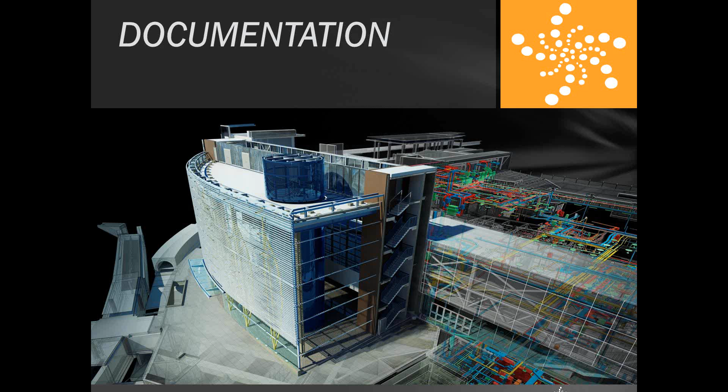So to start with, I'm going to look at some of the new documentation tools. First thing is searching. This is something that happens on just about every project. When you first start to use Revit, we're going to make new views, because every view of the model is a different kind of view.

I want to look at the first floor plan with color. I want to look at the first floor plan for code, for egress, for furniture. By the end of the day, you have one floor plan, and you might have 10 different views. Small building, not a big deal, but as your projects get bigger, you're going to have a lot of different views.

And for something so simple, it's finally in there: the ability to search your project browser. So if you need a specific view, you're not having 20 different employees spending 20 minutes a day trying to find it. It might seem simple, but that time adds up. This makes your workforce much more efficient in getting to where they need to do their work.

From that, we have better visibility and display controls. It might not seem like a big deal, but look at it from the AutoCAD days—one of the biggest issues was layer management and control of your views. Now that we're no longer in CAD, we're in BIM, the main emphasis is on information, but we still have to make sure things show up correctly when we print out our documents, since that's still the deliverable.

One of the things this really benefits is the ability to control and track all of my views, to make sure they're matched the way they should be. So if I've got a drawing standard, things that should be applied, I now have more things I can put into that template, and I can track that template's usage a little bit better.

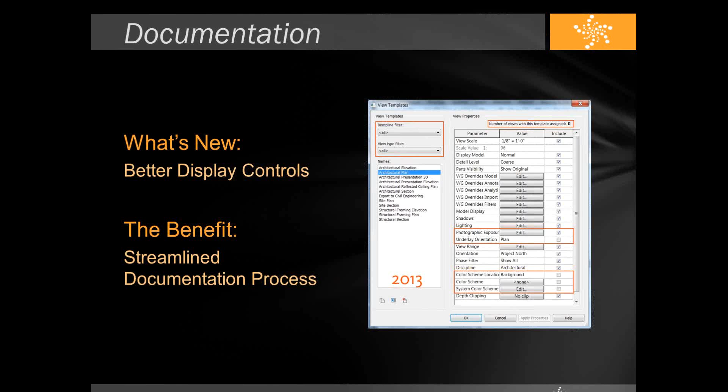So moving into the content generation portion of this: stairs. This has been a big one. I've been using Revit since version 6, and since then there have not been any updates to the stairs. So that slide Mike showed you with the old car and the new car—that's pretty much the jump this is starting to take.

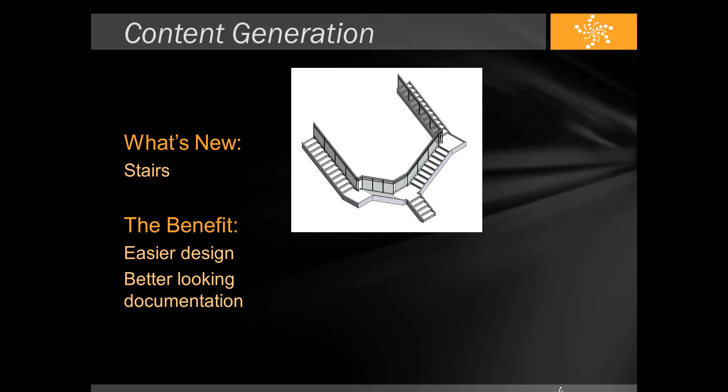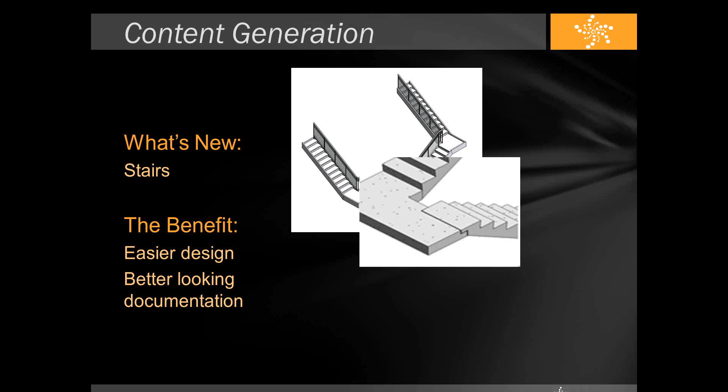What this is actually doing is giving us the benefit of doing stairs like that, where you see it's more of a Y shape. Setting up something like this, where if you have precast construction, you can actually model it—so you don't even have to detail it, you can model the connection between these very quickly.

A big gripe that a lot of people have had over the years with the stairs is that it doesn't look the way that they want, or it doesn't display the way that they want for the documentation sets. So it's giving us a lot more control of both the modeling aspect, the design aspect, and the documentation aspect. This is definitely a good step in the right direction, giving us the freedom we need to design the way that we want without having to resort to workarounds or very complex ideas.

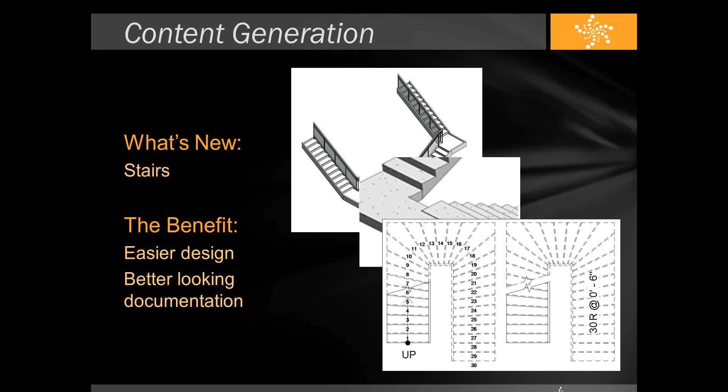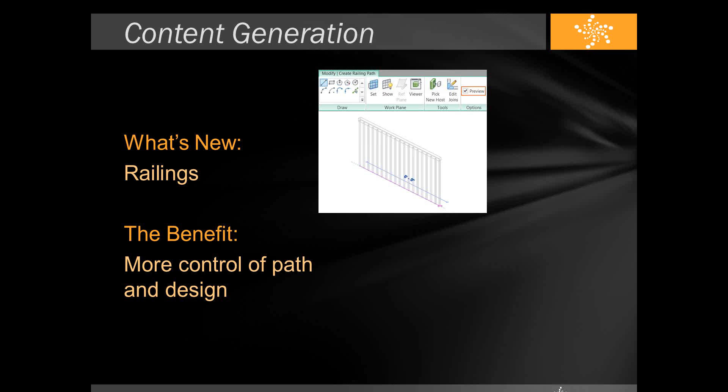Now, sort of in conjunction with the stairs are my railings. Probably one of the main things with the railing is that you can actually preview what you're working on. So rather than just drawing a purple line and finishing it, then realizing that's not what I want and having to go back in and edit again, I can actually preview the railing as I'm building it. So I can confirm that's actually my design intent prior to leaving my sketch mode, which speeds up and makes my design process a little bit more efficient.

In addition to that, I have more control over my parts. I can get very detailed very quickly and easily, and I have a lot more control over the path. Now, that image on the bottom right-hand side, for most users of Revit, that railing probably looks like a post, something you add to the end that just finishes or terminates. The thing is, a post is typically custom content - it takes time and ability to create. But that right there is not a post. It's a user just going and sketching what he intends that railing to actually do, without having to create custom content, and without needing every single user on the project team working on stairs to have an advanced level of family knowledge. It's just picking it, drawing the path, and then finishing what you want. So it speeds up the actual design and documentation process and makes this much more fluid and much easier.

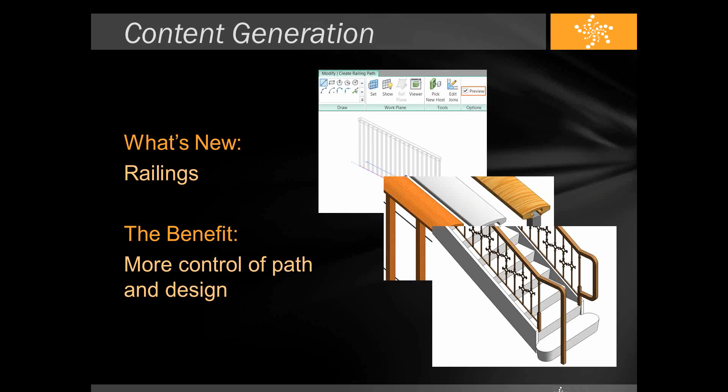Now, another one here is parts. The idea of parts is not new to Revit - this was actually added a year or two ago. What is new are the different things that you can do with the parts. I can actually merge different parts together, and this is something I'm actually going to be showing during the demo. So if what I want to do is have a corner that's essentially maybe precast, I'd have to actually draw this as 3 separate walls, because I couldn't really draw and join 2 separate parts together before, but this is something I can do now.

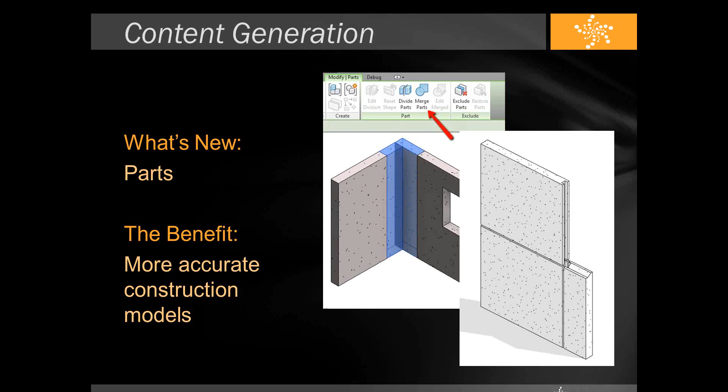Now, visualization. You've had the ability to do rendering in Revit for a while, and what they recently added was the realistic view. The nice thing about the realistic view is you can get an idea of what the view would look like when rendered without having to spend the time or energy to actually render it. Now, they've updated that so it includes RPCs, so you can actually see the rendered content. The thing is, it's still not a real rendering.

What they've added this year is an actual ray tracing view. So if you look at it this way, you've got your old school colored view, and then you would look at your realistic view - that's one step above that. Now we have the ray tracing view, so you'll have better images, both day and night, so you can really see what's going to happen. What happens when you have lights in the room during day, during the evening? What happens if you have a decal, which is essentially an image in the view - how will that actually look when I render this? So if I want to do a rendering and get a quick preview at a good level of quality, this allows me to do that.

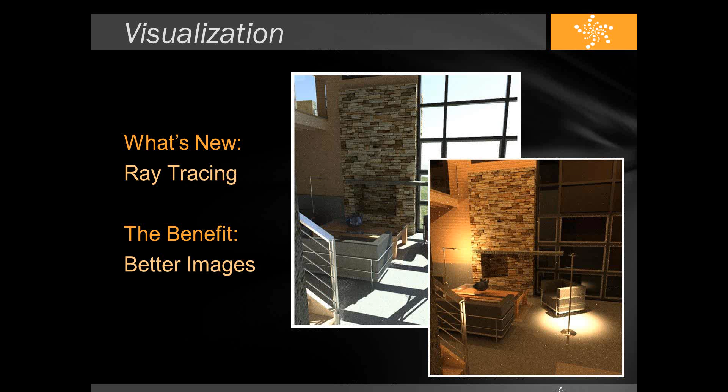Let's say my computer is barely running Revit as it is, or I have a lot of renderings to do and I need to keep working. I can't stop and let my computer sit here and render, otherwise I'm going to lose all my time for documentation. What Autodesk is doing is they've taken all of the different features they've been trying to push for a while, and that were going to be online, and consolidated them under the moniker Autodesk 360. So when you hear Autodesk 360, that's essentially their cloud family of software.

Part of this is the rendering ability, and this is actually built into Revit right now. If you're on subscription, you have access to this and can take advantage of it. The real benefit is unlimited power when it comes to rendering. If you have one computer and need to render an image, that image might take 2 to 3 hours. Now let's say you have an office with 10 to 20 computers set up as a render farm - that rendering might take 15 to 20 minutes. If I send my rendering to Autodesk's cloud, that rendering might take 1 minute.

So if you've got a render farm, that's great - it enhances the power you have access to, because it's not just one computer working on it, you've got 20 or however many you have. The thing is, you likely don't have hundreds or thousands at your disposal. So this is taking advantage of Autodesk's servers in the cloud, and they're running what they need to get you back your renderings. It has a nice interface, and you can actually see the difference this would make based on the display and graphic level you're looking for. It'll show you how much time you're actually saving.

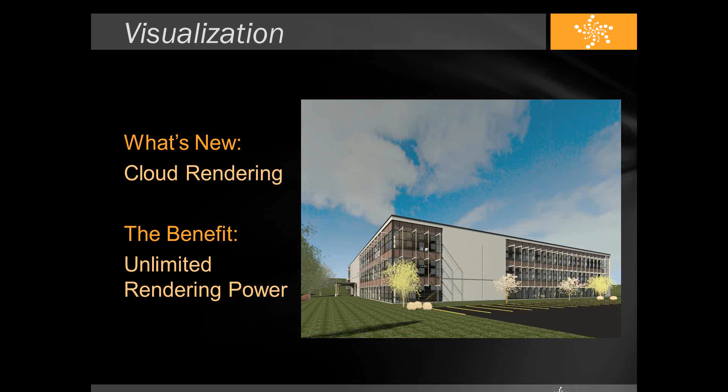So if you're using the design suite, the Building Design Suite Premium or Ultimate, what you actually have access to is Revit. You're going to have an architecture ribbon, a structure ribbon, and a systems ribbon. Now, this presentation is focused on Revit Architecture. So if you're wondering why I'm talking about Revit Structure or Systems and how that actually relates to you - you know, your business doesn't deal with that.

Well, the thing is, if you're coordinating with somebody who is using that, this actually gives you some of those features. So let's say they're still giving you AutoCAD files, but you need to coordinate with something - I now have the ability to draw in a duct, so at least I can track it, coordinate it, and make sure I'm not clashing against that.

Let's say you need to take advantage of a couple of features that for the last couple of years were only available in another program. So if I wanted to do a filter based on selection - grab 10 objects and say I always want to filter based on those 10, but I don't want to have to pick them every time - that's something that's been in Revit Structure for quite a while, but was not available in Revit Architecture. Essentially, this is taking all of those tools and features and giving them to you now.

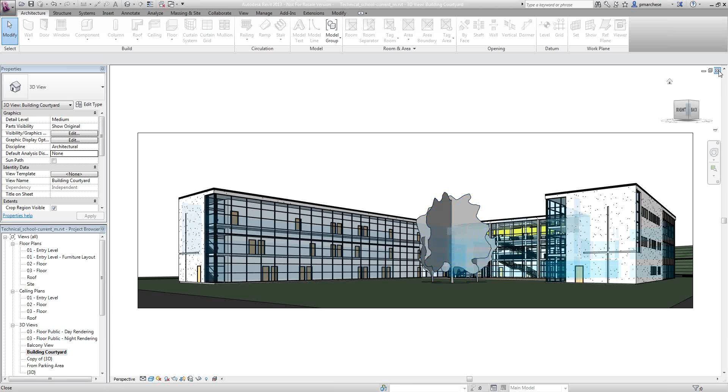All I have to do here is right-click, and the first thing there is search. When I click on search, I just tell it what I'm looking for. So they told me I'm looking for something about the courtyard, so I type in 'court.' Next, there's my building courtyard. I can say close, previous, or even force it to match the case if need be. And then I'll find my building courtyard.

So it's a very quick way for me to go into something and actually see what I'm working on. And all I'm doing is right-click, search, and then it finds my view. So nothing else besides that.

Now, another thing from this is managing my views. I mentioned before the ability to control what's happening. If I'm looking through my view here, one of the things I've always had is the ability to set my view template, but this has been enhanced. What I can see now is that this view is assigned the architectural plan view template. I can see that one view has this template assigned, and since this one is assigned it, I'm guessing that's the only one.

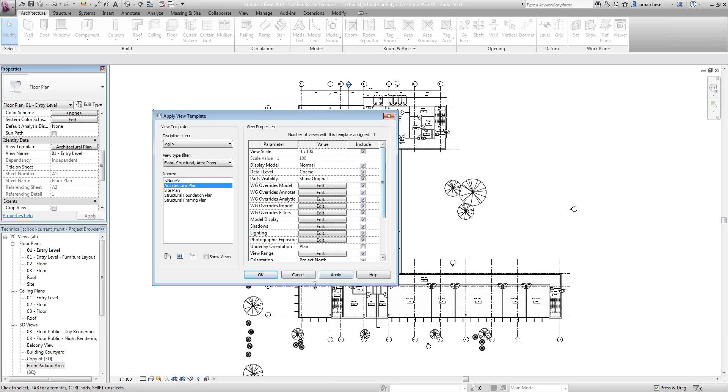Now, if you have a project and you're trying to make sure all of your views are maintaining the right look, the right line weight, the right detail level, the right things turned on and off, what I can actually do is go to my schedules, and I can track my entire project from here. I can see all the views in the project, and I can see the view template assigned to the view in my schedule now. Creating schedules and managing your views from this is nothing new, but seeing the view template in here is new. This is just a quick thing you can do to make sure that before you plot or send out your PDFs, things are according to the way they should be.

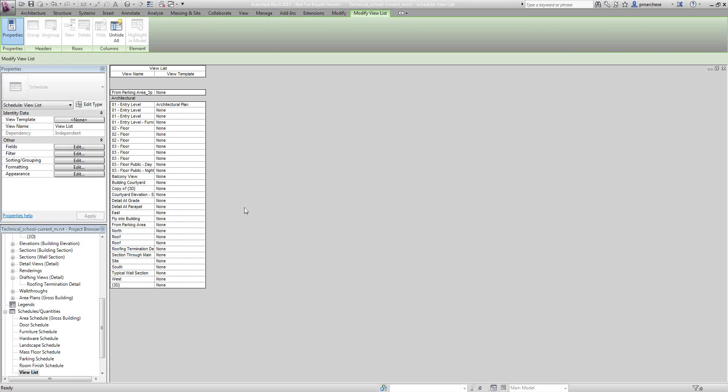So what I'm going to do is switch gears for a second and start looking at some of the modeling. Now, this is just a regular stair, nothing that different. When I select it, I can say Edit Stairs. What you're going to notice is that I'm actually in a 3D view, and I can still see my stair. I can still select it and see what's going on with this. This is not something that was there last year.

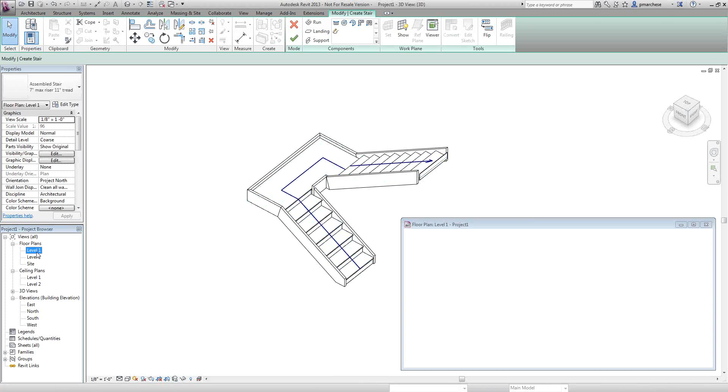When I select my stairs, I can see my counts, both at the beginning and end of each run. I can grab this and just stretch these and modify everything that's happening here. So a lot more flexibility, a lot more ease of use, and a lot more control.

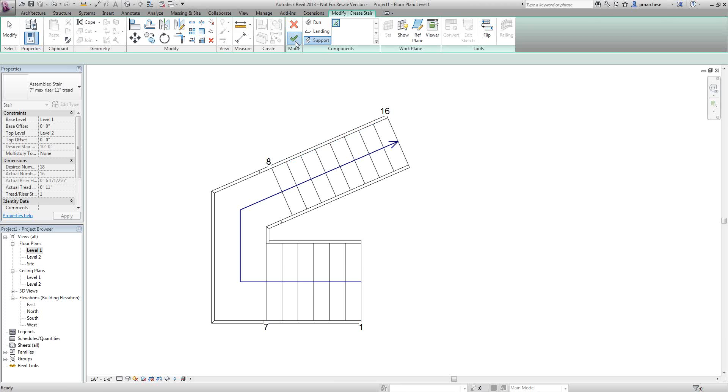And now I have the graphics here. So let's say I'm not really crazy about the way the graphics look. I can actually modify how all this looks. And if I look at the settings that I actually have, I have a lot more things that I can control. So the reason why you didn't like using stairs before was because you couldn't control their visibility or the way that they looked graphically. You actually have this control now.

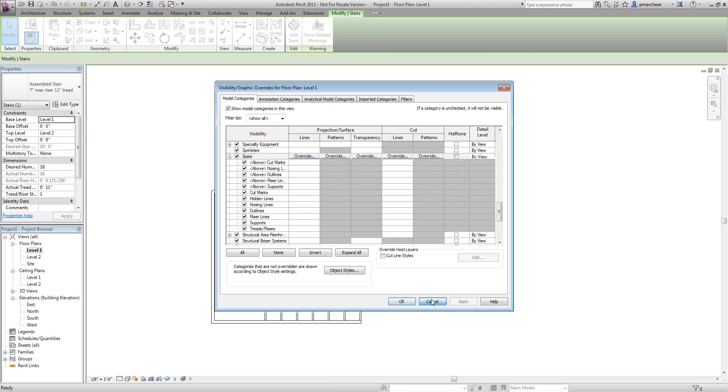I can turn off everything above. I can modify the way things look when they cut. I can actually get rid of that cut or have a double cut there with a gap in between. And probably one of the biggest things here is when I draw my stair, I can do stairs by component now. Essentially, it's me just drawing a piece of a stair, and then I can set that up to do whatever it is that I want.

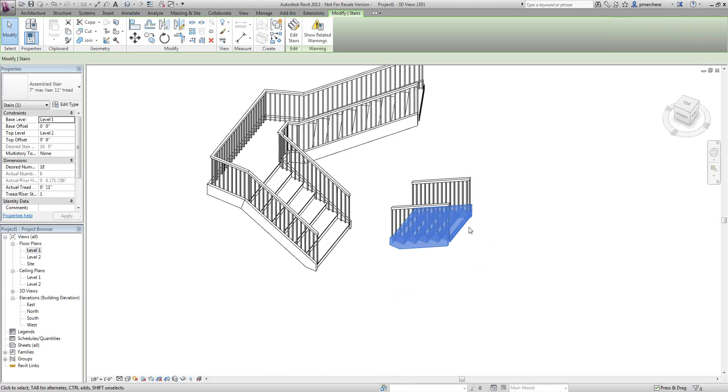So if you have a stair that has to go up and back and up again, essentially a 3-run stair, what you used to have to do was put in intermediate levels or a whole bunch of offsets. Now I can just model it.

And if I wanted this railing to keep going, I'd either have to make a new railing if I only wanted the top portion, or have to have a custom post put on the end. Now I just hover, grab that piece, and I edit this.

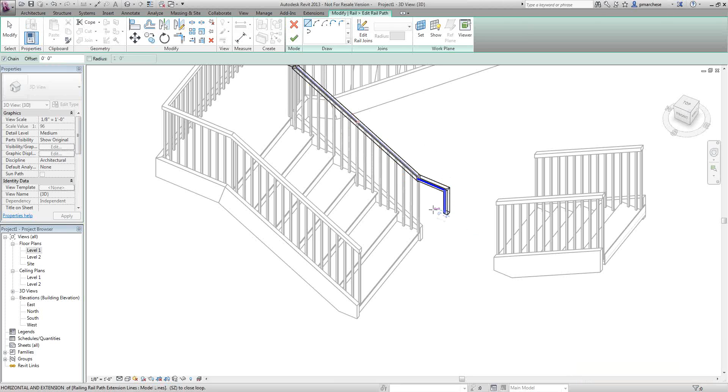So I just go in there and start drawing whatever I want this to be. Notice how I'm still in sketch mode, but I'm able to actually see what happens before I finish. I didn't have to finish my sketch and then say, oh, that's not what I was looking for. I can just keep modifying this and changing it, and it'll show me my preview so I can confirm that, yes, that is actually what I wanted this to look like.

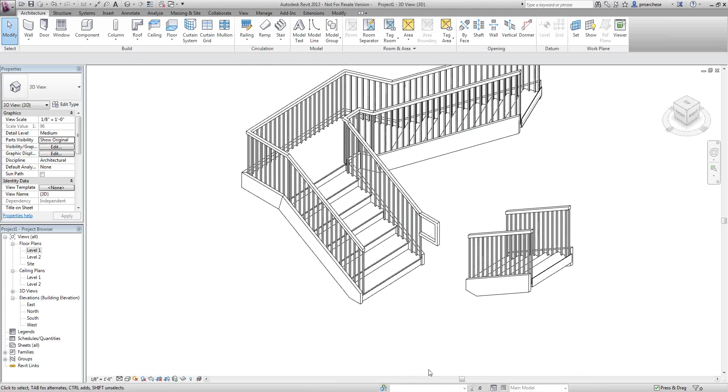Again, I'm showing the features, not my ability as an architect, but these are little things I can do. And that little nub right there, if you're familiar with the old versions of Revit, that would have been a little bit of a mess. The new version also gives you more control and more abilities to handle little issues like this, where there's a little bit of a jump.

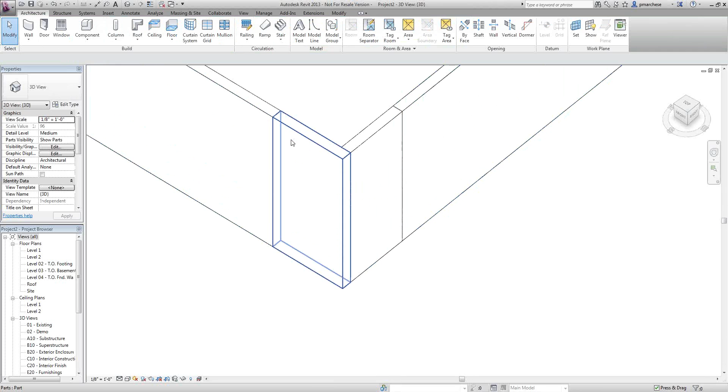So, change gears one more time, and I'm going to look at those parts. This right here are 2 parts of one wall, so that wall has been split. Same thing for here. Now, if this was going to be a precast corner, that wouldn't be 2 pieces necessarily, it might be 1. What I can do now is grab my parts and either exclude them or merge them, same as before. But now when I select these, I can tell it to merge. That's now 1 piece.

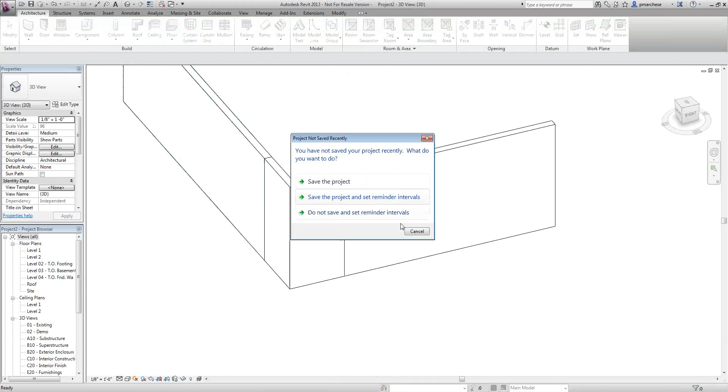So I can actually do a lot of things like that. I can even take a column, drop this in, make that a little bit taller.

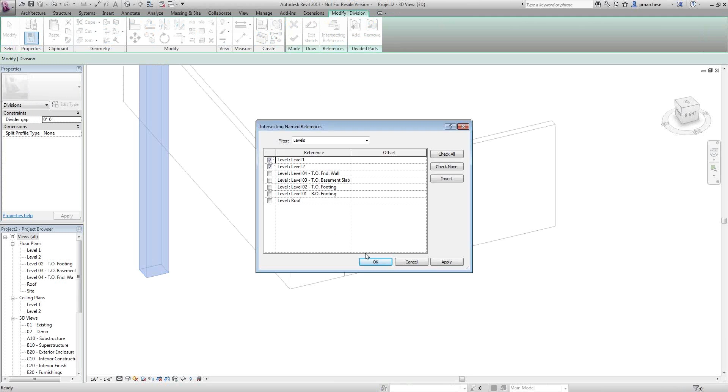What I can actually do is create a part and then divide that part. So if I wanted to, I could leave this as one column and then show this as individual pieces. That way I can manage all of them from the original column that's essentially still there. So a lot of little things like that.

Again, the key new features here, I wasn't focusing on all of them. There's a lot of new things inside of this: documentation, ease of use, streamlining my workflow, trying to cut time away from tasks that would just eat it up without being useful. Content generation is allowing me to actually do the things I've been thinking about without having to resort to workarounds or excess work for what in many cases was a simple change. Visualization is taking advantage of what you've already modeled and not having to redo it over and over again, whether that's using the collaboration to send it to the cloud, or just opening that file up natively in Navisworks, inside Max, inside Showcase. So the main things here, and the biggest one, is the collaboration, because they're trying to make sure that regardless of what you're using, it has a clean, smooth, and efficient workflow.

Now, Revit is part of the Building Design Suite, and when you buy it as a design suite, you're going to be getting Revit—not necessarily Revit Architecture, but just Revit. That gives you all of the features of the three different disciplines. You can also buy Revit Architecture on its own.

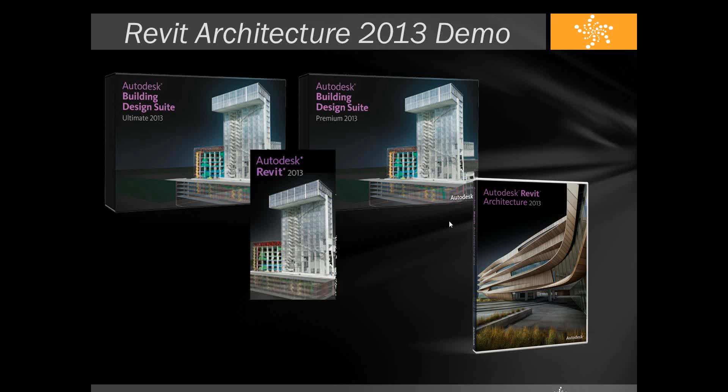Now, this was focusing on the key features. What we're going to be doing is having a more in-depth webcast in May that's going to go through all of the new features, so a little bit more techy. This is supposed to be a little bit more higher level.